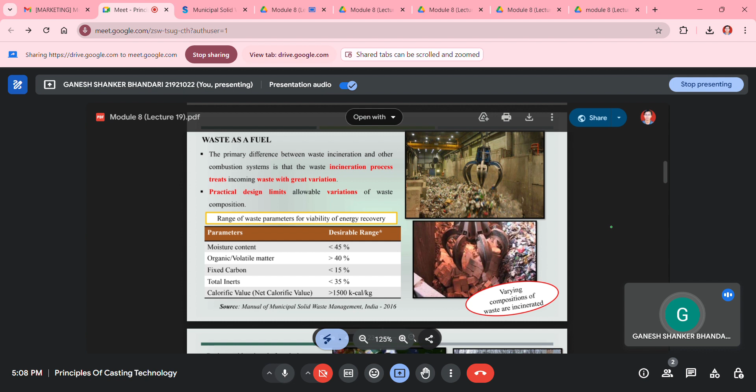Otherwise, if we are going to treat municipal solid waste having a calorific value lower than 1500 kilocalorie per kg as a fuel source, then we will not get the economy out of that process, because we also have to maintain the economy of the process.

So there are some basic considerations before designing municipal solid waste as a fuel source. Best available data on the amount and composition of each waste type has to be generated. Effect of future change in waste management has to be taken into consideration, along with how much street sweeping, construction, and demolition waste is coming frequently.

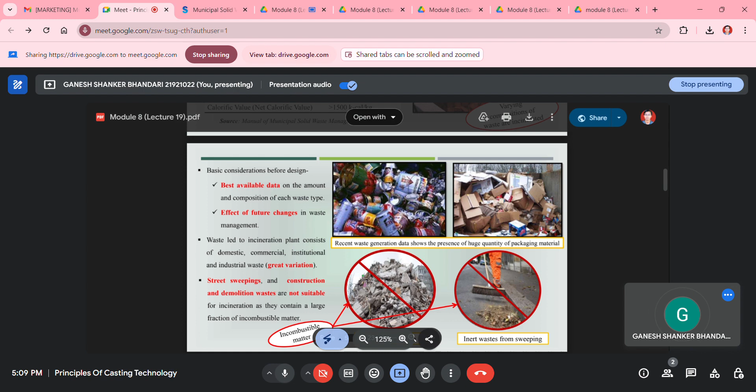That amount has to be taken into consideration, because they cannot be treated as a fuel source. They will finally report into the ash content, and they will not participate in the fuel source or the combustion or incineration process of municipal solid waste management.

Then there are some key parameters during the characterization of waste as fuel. First is heating value - heating value per unit weight or volume of combustible material that is going to be completely burned. Heating value is roughly proportional to the waste that is combustible, excluding moisture and ash content, and to the carbon content of the combustible fraction.

Then moisture content - it is a critical parameter of the waste being treated as a fuel source, because if the moisture content is very high inside that municipal solid waste, whatever energy is produced during the incineration or combustion process is going to release the moisture content in vapor form. So we will not get efficient heating value from the incineration of that municipal solid waste, so it has to be lower than at least 45%.

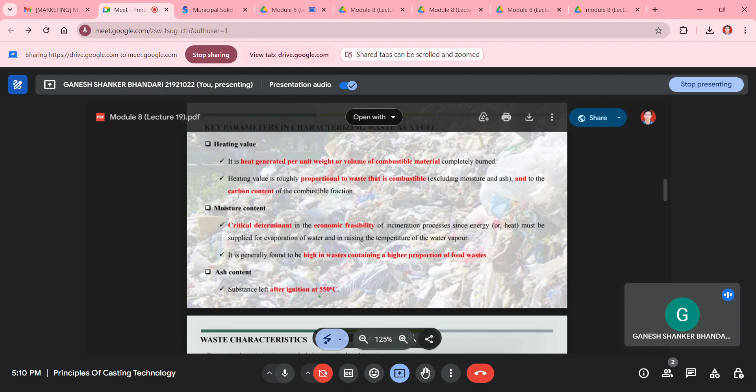Coming to the ash content, it is the substance left after ignition at 550 degrees Celsius. This mainly contains inert materials like street sweepings or demolition waste if coming with the waste content, and sometimes silica content, glass content, or metallic content if present in the waste material will finally go into the ash content.

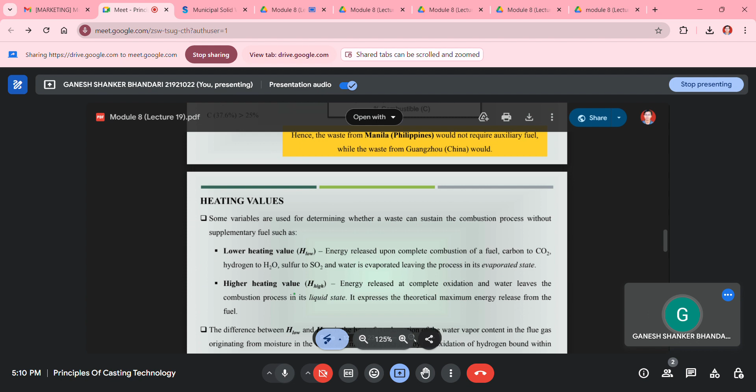Coming to the heating values of the waste, some variables are used for determining whether a waste can sustain the combustion process without supplementary fuel. If we are going to incinerate that municipal solid waste material, first we need to decide if we have to provide some extra fuel material during the combustion process to get efficient calorific value to produce energy or use that energy for something substantial. Whether we need extra fuel material with the municipal solid waste or not will be decided based on the heating values of that waste.

There are two types of heating values we have to take into consideration. First is lower heating value, which is the energy released upon complete combustion of a fuel, where carbon converts into CO2 gas, hydrogen converts into H2O gas, and sulfur converts into SO2. It is complete oxidation of the materials present in the municipal solid waste, and water is evaporated, leaving the process in its evaporated state.

Coming to the higher heating value, energy is released at complete oxidation and water leaves the combustion process in its liquid state. It expresses the theoretical maximum energy released from the fuel, excluding the content of water which would evaporate, as accounted for by the lower heating value. The difference between higher (H high) and lower (H low) heating value is the heat of condensation of the water vapor contained in the flue gas, originating from moisture in the waste and moisture generated by oxidation of hydrogen bound within the chemical structure of the waste.

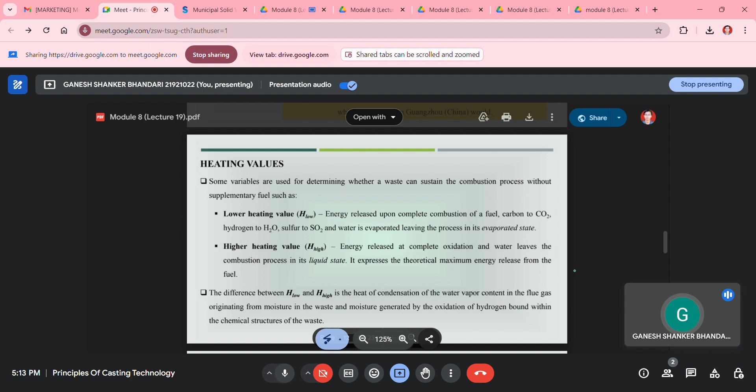With the help of these concepts we can calculate the heating values or calorific values of the waste material. There are formulas for calculating higher and lower heating values. Higher heating value can be calculated with the formula: H low plus water plus hydrogen content into 8.937, into 24.45 kilojoule per kg. The lower heating value can be calculated based on the chemical composition of the solid waste material, like carbon, hydrogen, oxygen, nitrogen, and sulfur content present in the municipal solid waste.

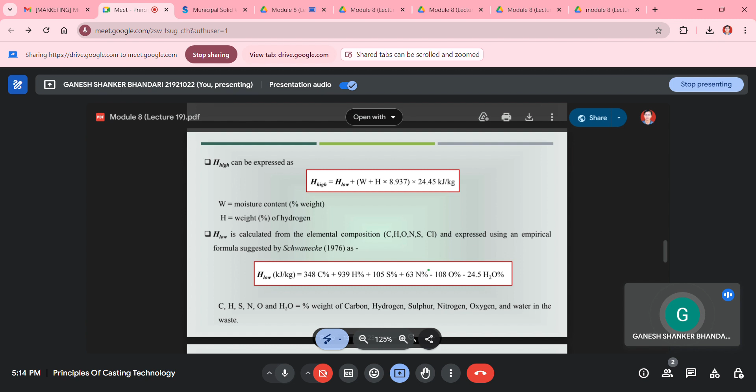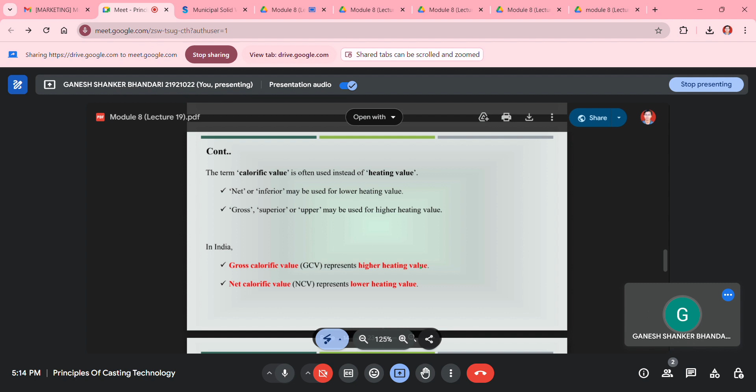The term calorific value is often used instead of heating value. Net or inferior may be used for lower heating value, and gross, superior, or upper may be used for higher heating value. So we can call lower heating value the net calorific value or inferior calorific value, and higher heating value the gross calorific value. In India, we generally use the terms gross calorific value and net calorific value instead of lower and higher heating values.

Coming to the next topic, we can create refuse derived fuel using municipal solid waste. According to this pyramid structure, the most preferred process for recycling municipal solid waste is reduction and reuse. Then we can recycle that waste, such as recycling glass material, cardboard material, or recovering metallic values from the waste material. Then we can go for the composting process.

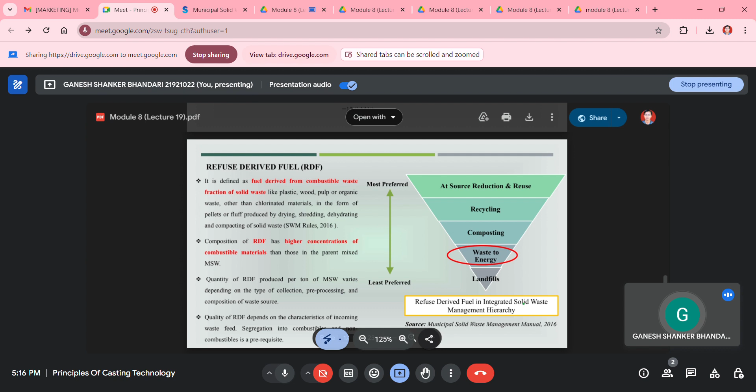So we can see the waste to energy conversion process is the least preferred process during the management of municipal solid waste. After that waste to energy conversion process, whatever is left behind, like demolition waste or inert waste, or whatever ash content is produced, that can go for landfill process. So refuse derived fuel is in the integrated solid waste management hierarchy at a lower position.

And the quantity of RDF produced per ton of MSW varies depending on the type of collection, pre-processing, and composition of the waste source. That will depend on the carbon, hydrogen, nitrogen, sulfur content, and it will vary according to the waste composition.

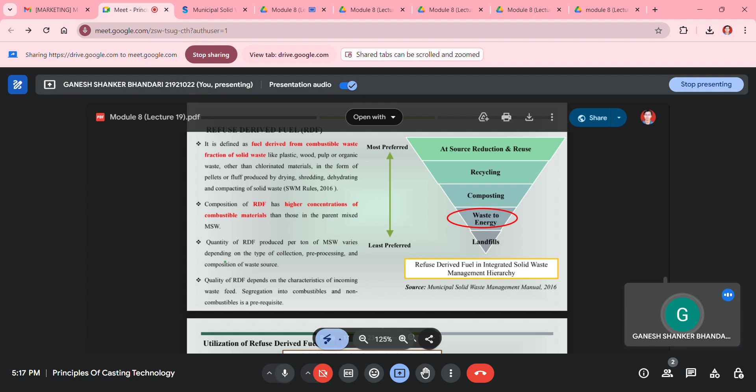If waste composition contains a higher amount of dry waste containing cardboard or paper waste, or leaves and woody material, that waste can be converted into high value refuse derived fuel, because it will have a much higher calorific value. Otherwise it can be converted into low calorific value, which will be of no use to further processing plants.

So for utilization of refuse derived fuel in India, where we are going to use this RDF content, we can go for some industries like waste to energy conversion process or power plant processes, or we can provide this RDF to some households which can use RDF material as a fuel source.

So we can use this RDF material as a fuel source in power plants, similar to how power plants use Indian coal as a fuel source material to produce steam, and by that steam we can produce electricity.

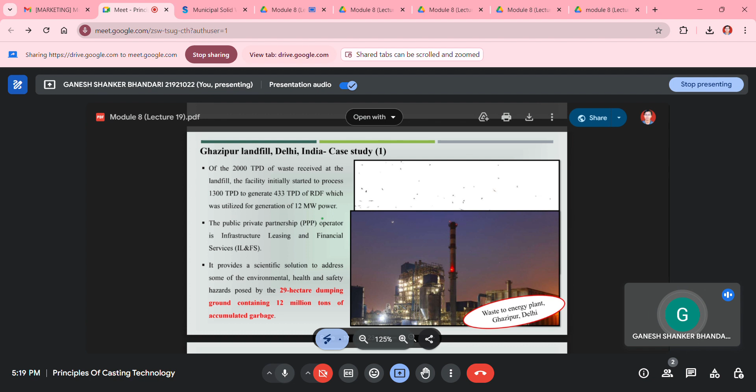There is one case study of the Ghazipur landfill located in New Delhi, which receives around 2000 tons per day of waste, and that facility initially started to process around 1300 TPD to generate 433 TPD of RDF, which was utilized for generation of 12 megawatt power with the help of a power plant.

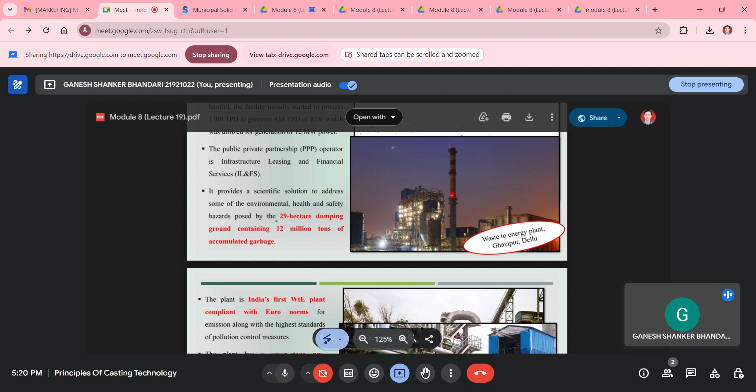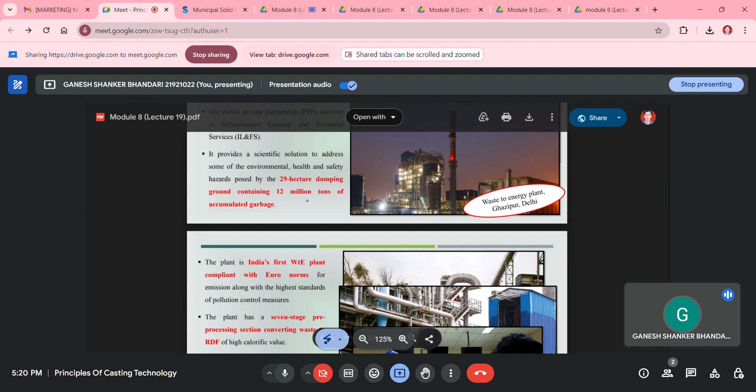The public private partnership (PPP) operator is Infrastructure Leasing and Financial Services. It provides a scientific solution to address some of the environmental, health, and safety hazards posed by the 29-hectare dumping ground, which is used as a landfill site containing 12 million tons of accumulated garbage.

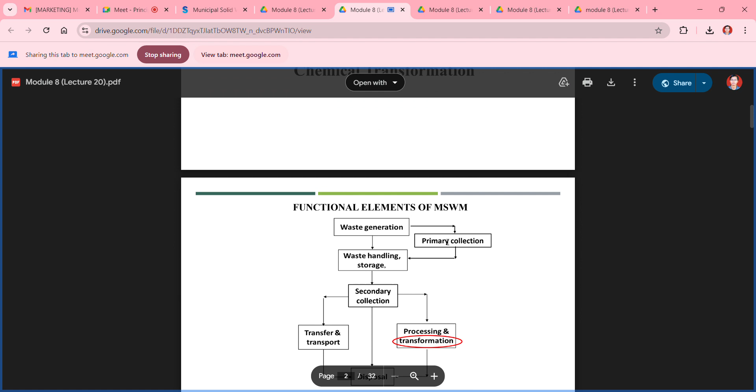Then coming to, so either we can convert that waste material into RDF material to use as a fuel source, then after converting them into RDF, we can go for incineration or combustion process.

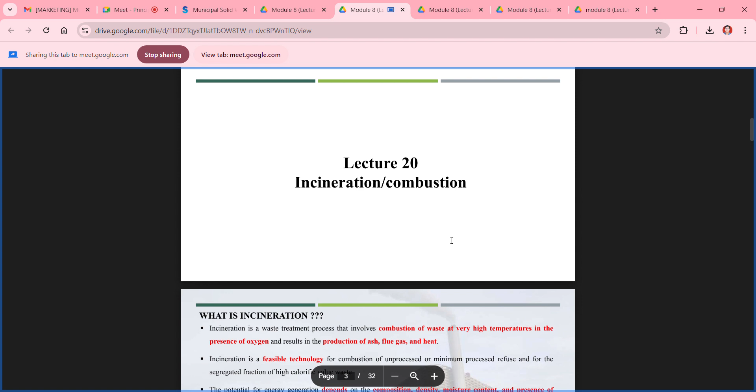So what is the incineration process? The incineration process is basically defined as combustion of waste at very high temperature in the presence of oxygen, and it will result in the production of ash, flue gas, and heat.

That heat can be utilized to produce steam, and that steam can be used to produce electricity. This incineration process can help to reduce the landfill volumes of municipal solid waste.

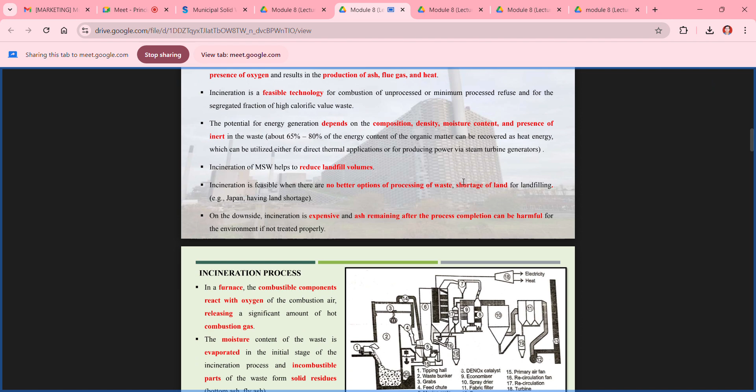There are some equipments generally combined in the incineration process, like a furnace for the combustion process. In the furnace, the combustible components react with oxygen of the combustion air, releasing a significant amount of hot combustion gas, which will have a temperature of around 500 to 800 degrees Celsius.

Or 900 degrees Celsius, and that temperature can easily convert water into steam with the help of a boiler, and that steam can be used to produce electricity in the power plants.

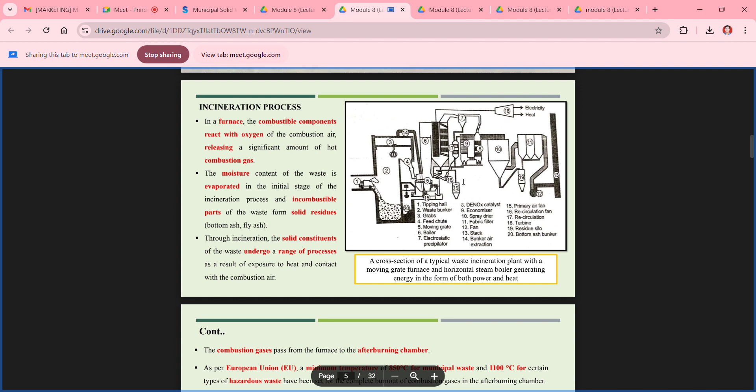The combustion gas passes from the furnace to the after burning chamber. As per European Union regulations, a minimum temperature of 850 degrees Celsius for municipal waste and 1100 degrees Celsius for certain types of hazardous waste have been set for the complete burnout of combustion gases in the after burning chamber. This temperature should be maintained for a minimum time of 2 seconds, as measured from the last injection of combustion air.

Now coming to a brief history of waste incineration. The first incinerators were developed in the United Kingdom in the 19th century for municipal solid waste management. The waste incinerator plants treat waste of great variation in composition, and moving grate technology was developed in the 1920s and 1930s, and developed as a combination of grate with rotary kiln a few years thereafter.

Waste incinerators have gone through changes in technology. First we were using static waste incinerators, then we moved to grate incinerators, and then to rotary kiln type incinerators. Then we utilized electrostatic precipitator processes to remove most of the dust from the flue gases by the 1970s and 1980s, and in the 1990s we incorporated the after combustion chamber.

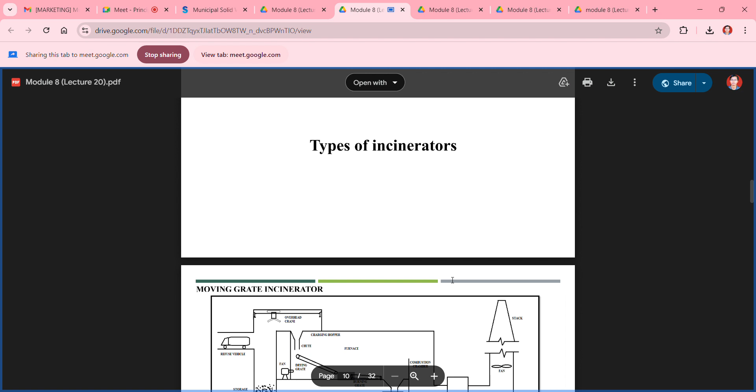There are different types of incinerators commonly used in industry for combustion of waste material, RDF, or even coal material, to convert these fuel sources into high temperature flue gases. That flue gas is used as a heating source for water to convert into steam.

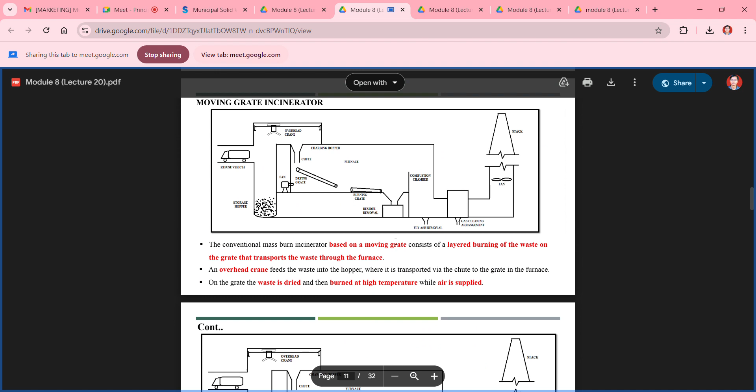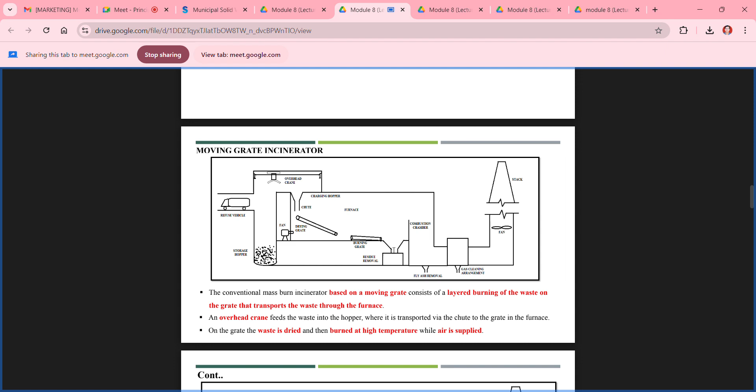There are different types of incinerators, like moving grate incinerators. In a moving grate incinerator, there is a conveyor belt that moves above a furnace at high temperature, and oxygen gas is continuously purged into the incinerator. The RDF material or municipal solid waste combusts and converts into gaseous content. There are advantages and disadvantages of moving grate incinerators; these types of incinerators can accommodate large variation in waste composition and heating values.

Can be built in very large units, like we can build an incinerator up to having a capacity of up to 50 ton per hour.

And there are some disadvantages also, because these types of plant installation cost is very high, and maintenance cost is also relatively high, so we cannot match up with the economy of the whole process.

Then the second type of incinerator is rotary kiln incinerator. As suggested by the name, this is a drum type incinerator which rotates at some angle around 5 to 10 degrees.

This is having some angle of around 5 to 15 degrees, and it is going to rotate in the anti-clockwise or maybe clockwise direction depending on the process. From this direction we provide the oxygen for the proper burning or combustion of the municipal solid waste.

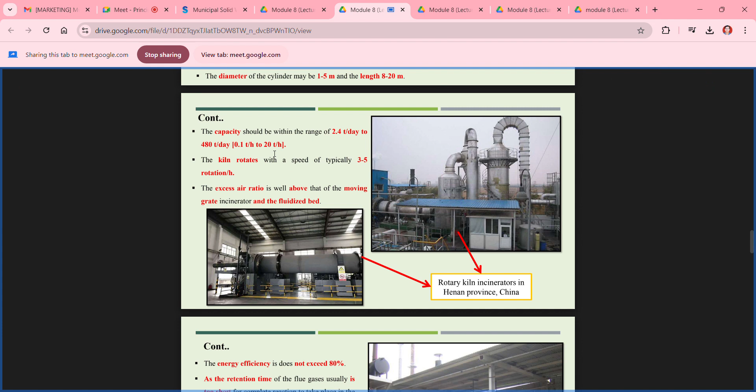It will have lower capacity as compared to the moving grate incinerator, which can have a capacity of around 50 ton per hour, but these rotary kiln incinerators can have a maximum capacity of around 20 ton per hour.

The kiln rotates with a speed of typically around 3 to 5 rotations per hour, and the excess air ratio is well above that of the moving grate incineration and the fluidized bed reactor.

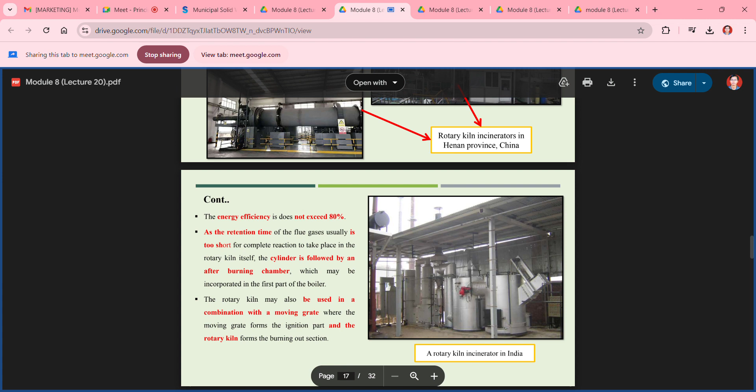So the energy efficiency cannot exceed more than 80%, as the retention time of the flue gas is usually too short for complete reaction to take place in the rotary kiln itself, and the cylinder is followed by an after burning chamber.

So we have to provide an after burning chamber having a temperature of around 850 to 1100 degrees Celsius, which may be incorporated in the first part of the boiler.

The rotary kiln may also be used in combination with a moving grate, where the moving grate forms the ignition part and the rotary kiln forms the burning out section part.

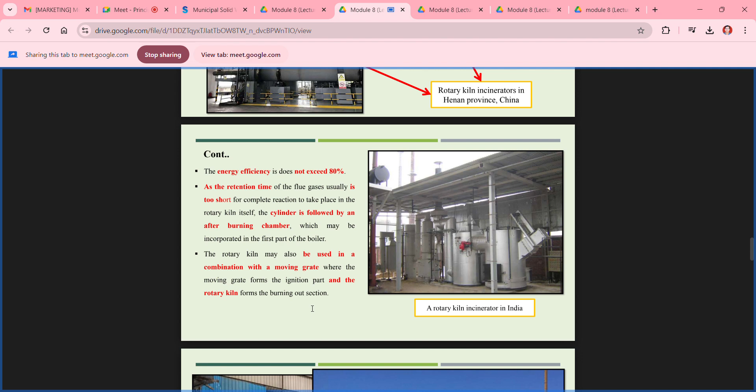So there are some advantages and disadvantages of the rotary kiln. It can be regarded as mostly similar to the moving grate incinerator, but its energy efficiency is lower. Moving grate incinerator can have an energy efficiency of around 95 to 96%, while the energy efficiency of the rotary kiln cannot exceed beyond 80%.

Those were the disadvantages of the rotary kiln. Some advantages are that the plant installation and maintenance cost is very lower as compared to the moving grate incineration, and rotary kiln may be used for new MSW incineration plants with high heating value waste.

So the third type of incinerator is fluidized bed incinerator. In the fluidized bed incinerator we can go with lower size particles - particles having very lower size are suitable for this incinerator.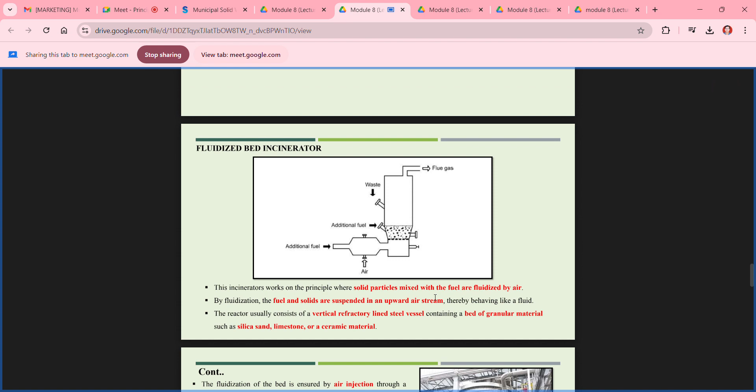The incinerator works on the principle where solid particles mixed with the fuel are fluidized by air, so they will be in the fluidized condition. By fluidization, the fuels and solids are suspended in an upward air stream, thereby behaving like a fluid.

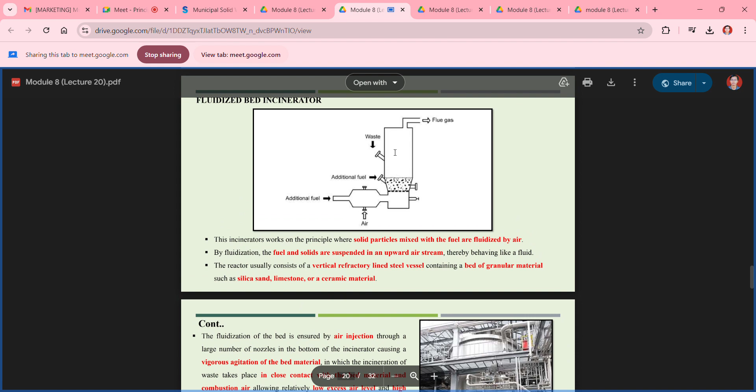This reactor usually consists of a vertical refractory lined steel vessel, as we can see in this figure, containing a bed of granular material such as silica sand, limestone, or a ceramic material.

The fluidization of the bed is ensured by air injection through a large number of nozzles at the bottom of the incinerator, causing vigorous agitation of the bed material, in which the incineration of waste takes place in close contact with the bed material and combustion air, allowing relatively low excess air level and high thermal efficiency up to around 90%.

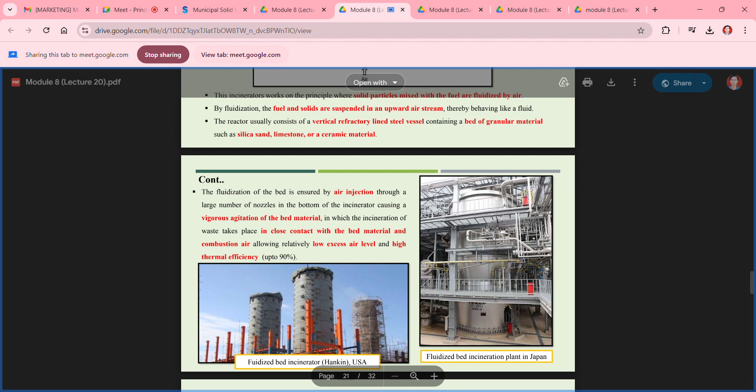So there are some advantages and disadvantages of the fluidized bed reactors, like reduction of dangerous substances in the fluidized bed reactor can be easily done.

There is flexibility regarding low quality fuels and cost, etc., and NOx generation may be low due to relatively low and well controlled combustion temperature. We can control the combustion temperature around 900 or 1000 degrees Celsius, while NOx generation can happen over around 1300 or 1400 degrees Celsius.

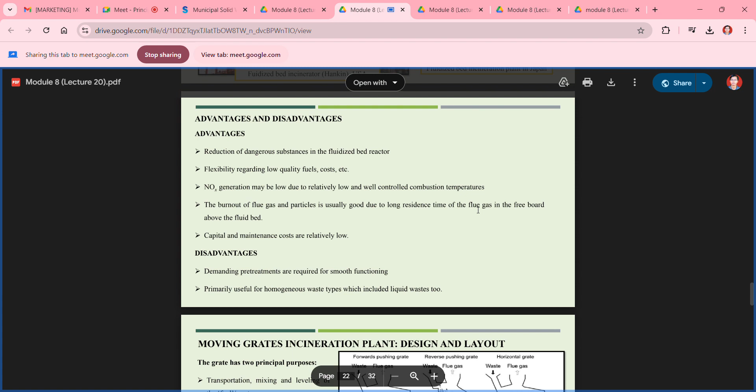So the burnout of flue gas and particle is usually good due to long residence time of the flue gas in the free board above the fluid bed, and capital and maintenance costs are relatively lower as compared to moving grate incinerator or rotary kiln incinerator.

There are some disadvantages also, like demanding pre-treatments are required for smooth functioning. As we have already discussed, these fluidized bed reactors demand lower size particles. The particle size cannot be bigger than around 1 mm or 5 mm, so that it can easily fluidize with the help of the air.

If the particle size is much bigger, around 15 or 20 mm, or 1 inch to 2 inch, we have to provide more pressure of the gas from the bottom to keep the particles in fluidized conditions. So it demands some pre-treatment process for smooth functioning, primarily used for homogeneous waste types, which included liquid waste too. In the fluidized bed reactor, we can use liquid waste also during the incineration process.

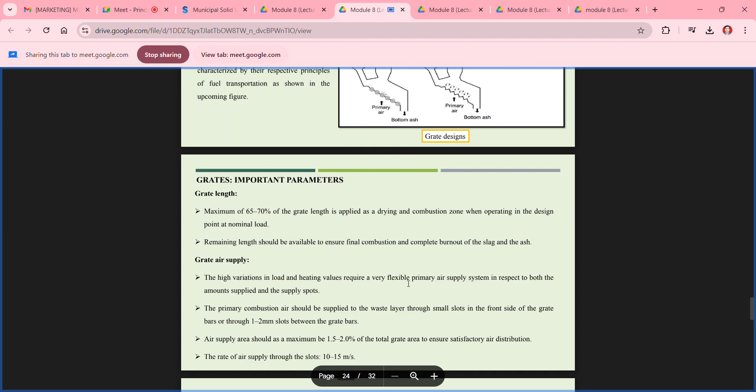Then these are the moving grate incinerators, and now let's see how the energy recovery system works.

First we are going to incinerate the municipal solid waste, or RDF generated with the help of municipal solid waste, and the gases generated during incineration are going to leave the furnace at a temperature of around 1000 to 1200 degrees Celsius.

These hot flue gases are cooled using boilers before being passed on to the flue gas cleaning system. With the help of these boilers, we are creating steam using the flue gas temperature of around 1000 to 1200 degrees Celsius.

During this process, these flue gases transfer their temperature to the boiler, converting the water present in the boiler into steam, and that hot steam is used for generating power in the power plants.

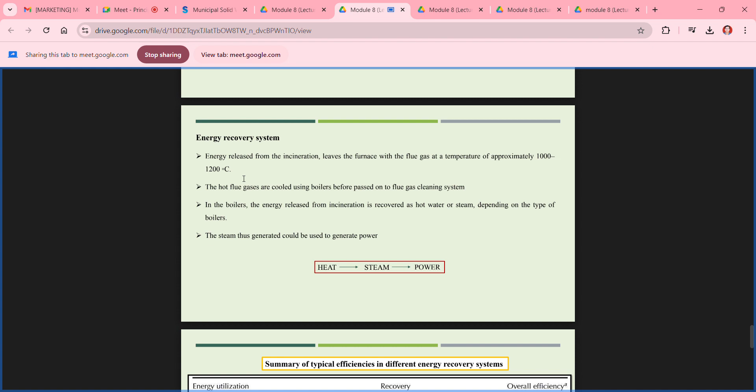During this conversion from water to steam, the temperature of the gases goes down from 1000 or 1200 degrees Celsius to around 100 or 200 degrees Celsius. After that, these flue gases, having a temperature of around 100 or 200 degrees Celsius, go to a gas cleaning system to recover any suspended particles, and after that flue gas cleaning system we release them into the environment.

So, summary of typical efficiencies in different energy recovery systems. If we are only going to heat it, energy recovery will be around 75 to 90%. Then we convert that heat into steam, and that recovery efficiency will also be around 75 to 90% itself.

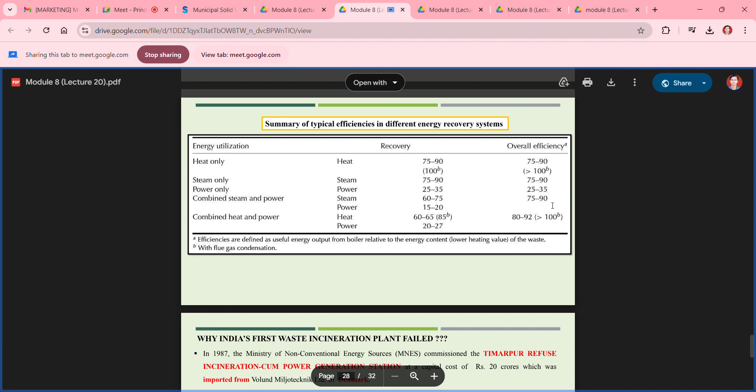Then this steam is utilized to convert into power. This power conversion will have an efficiency of only around 25 to 35%, so the overall efficiency becomes around 25 to 35%. A combined steam and power system can have an overall efficiency of around 75 to 90%.

Now we will go with some case study. India's first waste incineration plant was established in 1987, and it failed. It has not worked. It was commissioned utilizing a capital cost of around 20 crores, which was imported from Volund Miljoteknik of Denmark.

The plant was designed to incinerate 300 tons of municipal solid waste per day to generate around 3.75 megawatt of electricity, and it was designed to incinerate municipal solid waste having a calorific value of around 1462.5 kilocalorie per kg, or around 1500 kilocalorie per kg.

But the calorific value of the municipal solid waste which was supplied to the plant in those days was only around 600 to 700 kilocalorie.

So there was an attempt to supplement the combustion with diesel fuels, in order to maintain a calorific value of around 1500 kilocalorie. They implemented diesel fuel as a supplement material, but it also failed, and the ministry incurred an expenditure of around rupees 1.25 crores on the maintenance and insurance of the plant.

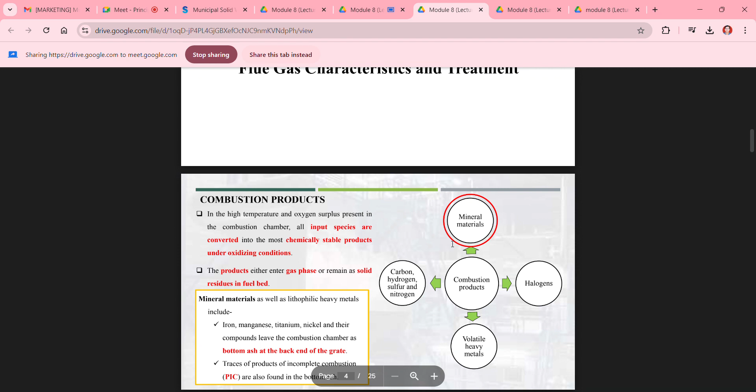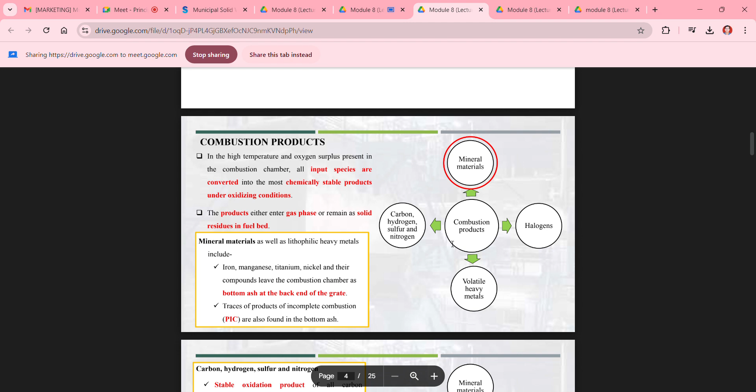During combustion, we get different types of products, like mineral materials in the form of ash content, carbon, hydrogen, sulfur and nitrogen gases, halogens like chloride or bromide, and some volatile heavy metals. In the high temperature and oxygen surplus present in the combustion chamber, all input species are converted into the most chemically stable product under oxidizing conditions. The product either enters the gas phase or remains as solid residue in the fuel beds.

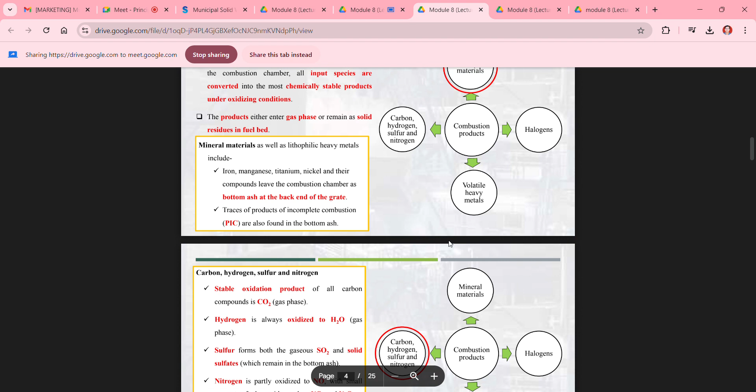Mineral materials as well as lithophilic heavy metals, including iron, manganese, titanium, nickel and their compounds, leave the combustion chamber as bottom ash at the back end of the grate.

Carbon, hydrogen, and sulfur convert into stable oxidation products: carbon into CO2, hydrogen into H2O, sulfur into SO2, and nitrogen into NO2 or N2O, depending on the temperature provided during the combustion process.

Depending on the operation mode, more or less particulate matter leaves the furnace as dust, also known as fly ash, in the flue gas. Incomplete combustion of carbon leads to formation of CO, TOC, polyaromatic hydrocarbons and soot particles, and these soot particles are known to be a source of toxic low volatility halogenated organic micropollutants, especially PCDD or furans.

These halogens are transformed into respective halides. Chlorine is mainly converted into gaseous HCl, while 10 to 15% stays as metal chloride in the solid residue. Bromine can be converted into HBr and metal bromide. Approximately 70 to 80% of fluorine is converted into fluorides like HF gas or in the solid part.

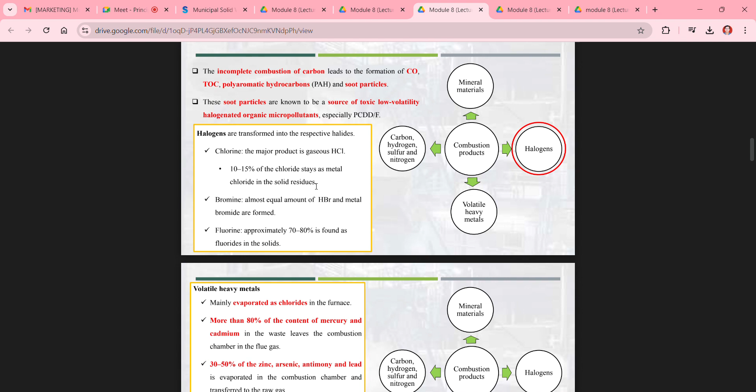The volatile heavy metals are mainly evaporated as chlorides in the furnace. More than 80% of the mercury and cadmium content in the waste leave the combustion chamber in the flue gases.

So we can say the flue gases leaving the furnace or combustion chamber will contain a sufficient quantity of mercury, cadmium and other heavy metals, HBr, HF, HCl gases, and some soot materials like CO, CH4, or unburnt hydrocarbons.

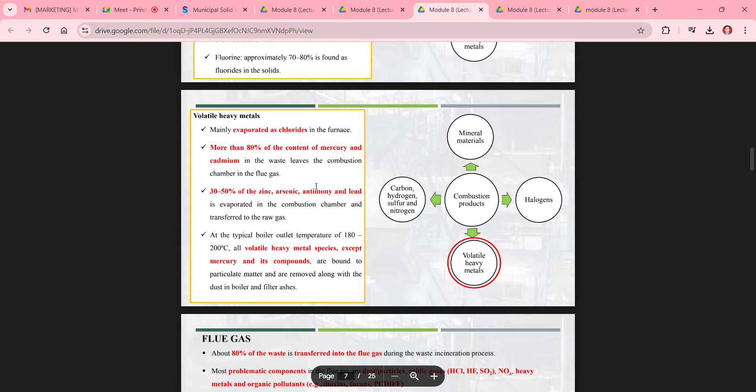So treatment of these gases is necessary. 30 to 50% of zinc, arsenic, antimony and lead, which are heavy metals, is evaporated in the combustion chamber and transferred to the raw gas.

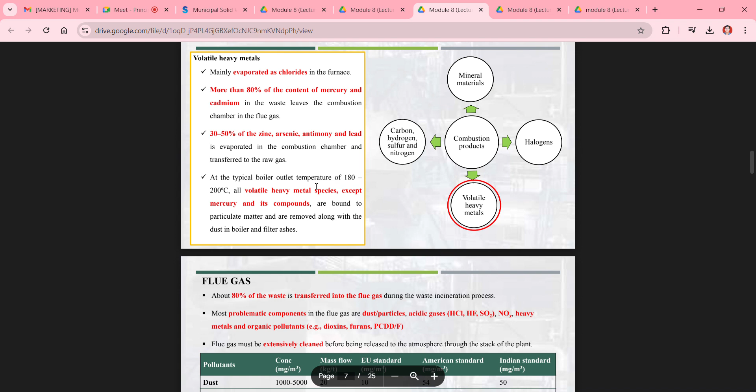At the typical boiler outlet temperature of around 180 to 200 degrees Celsius, all volatile heavy metal species except mercury and its compounds are bound to particulate matter and are removed along with the dust in boiler and filter ashes.

About 80% of the waste is transferred into the flue gas during the waste incineration process. The most problematic content in flue gases are dust particles, acidic gases like HCl, HF or SO2, NOx emissions in the form of NO2 or N2O, heavy metals, and organic pollutants like dioxins, furans and PCDD or furans. Flue gas must be extensively cleaned before being released to the atmosphere through the plant's stack.

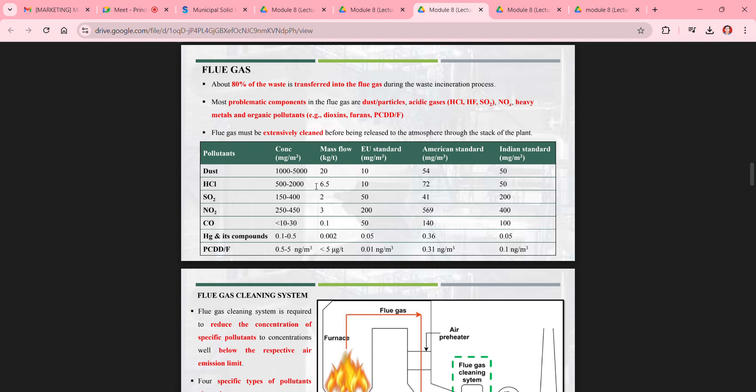A flue gas cleaning system is required to reduce the concentration of specific pollutants, as discussed earlier, to well below the respective air emission limits. There are four specific types of pollutants which need to be cleaned from these flue gases before releasing them into the environment.

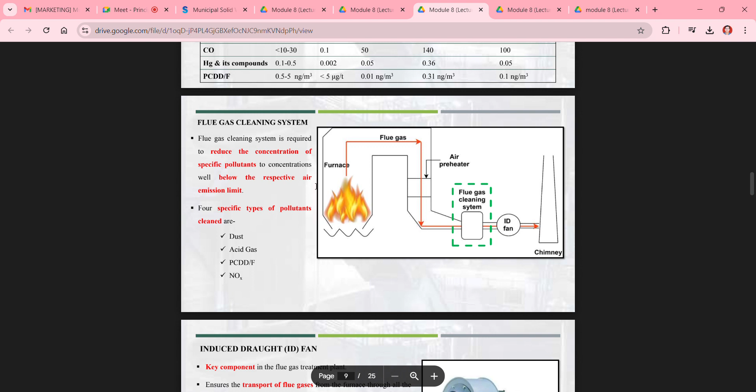First is dust particles, then acid gases like HCl, HBr or HF, then pollutant and harmful compounds like dioxins, furans, and NOx. There are some equipments needed during the treatment of these flue gases. First is the induced draft fan.

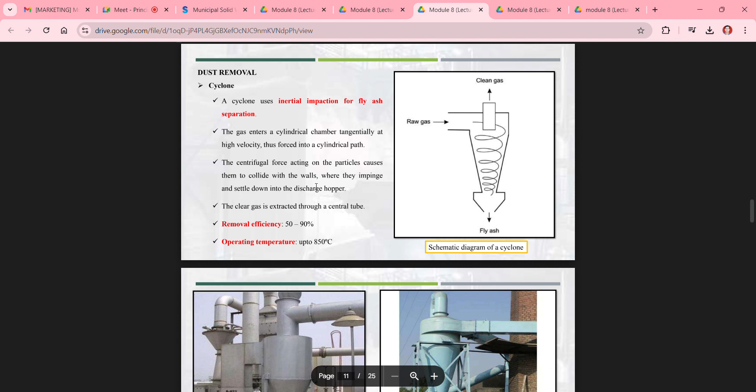Why are we using this induced draft fan? It will ensure that no polluted flue gas escapes from the process equipment by providing a reduced pressure therein. Due to that reduced pressure in the chamber, the flue gas will flow from the higher pressure to the lower pressure part, and from that lower pressure part we can transfer those gases into dust removal systems like cyclone, air cyclone, or water cyclone systems to remove the dust particles from these raw gases.

After removal of dust, we can also go with electrostatic precipitators. In these, we provide some negative or positive charge to the dust particles and to the plates provided in the precipitator, and due to the opposite charge, the dust particles are attracted towards these plates, and due to that attraction these get incorporated on the plates itself.

When we release the charge from the plates, the dust particles incorporated on the plates remove down and we can collect them. So the removal efficiency of electrostatic precipitators is very high, around 95 to 99.5%, and the operating temperature of the flue gases can be up to around 400 degrees Celsius.

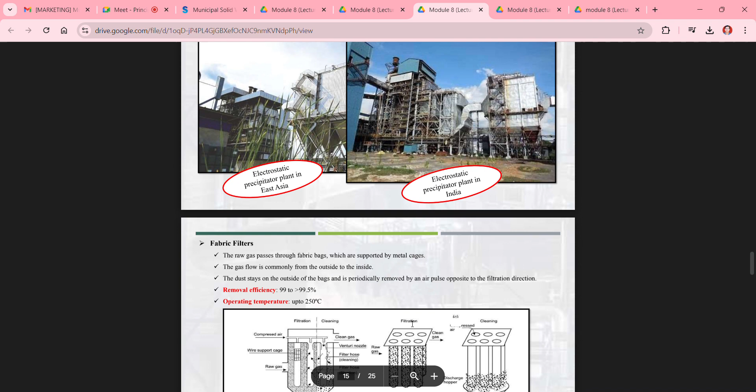Or we can go with fabric filters, because ESP precipitators are a costlier process. So we can go with the fabric filter process also to remove dust particles from the flue gases. These fabric filters have defined porous structures, and we pass the flue gases through these fabric filters.

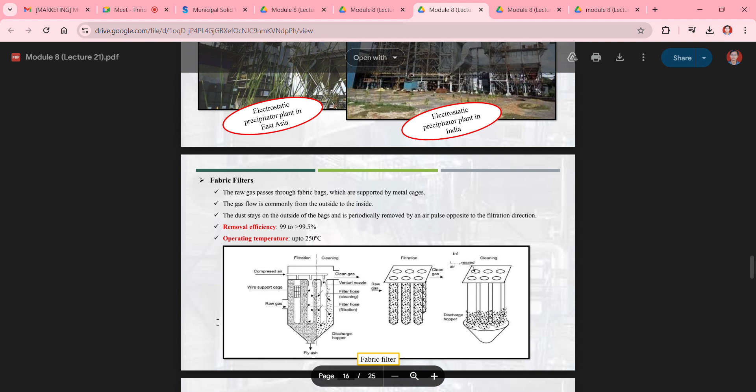According to the pore size, the dust particles get incorporated in these fabric filters, and the gas passes through easily. The removal efficiency can be up to 99 to 99.5%, and the temperature of gases fed into these fabric filters can be up to 250 degrees Celsius.

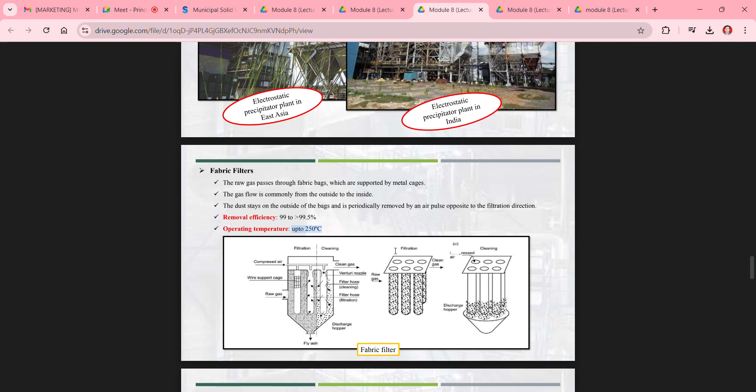Then we can also use a Venturi scrubber, similar to the cyclone separator process, or go with an acid gas scrubber system. With the Venturi scrubber, we provide a wet system by sprinkling water on the waste gases. Whatever HCl or chloride gases are coming in the flue gases react with the H2O sprinkled in the acid gas scrubber system, and the chloride gas gets converted into HCl acid in liquid form.

That HCl acid can be collected at the lowest part and refined again to be used as an industrial acid, or refined to be used as laboratory grade or analytical grade reagent. So during the gas cleaning process itself, we can generate a byproduct in the form of HCl or H2SO4, depending on the gases produced during the incineration or combustion process.

We can also go with dry systems, where Ca(OH)2 or NaHCO3 are injected into the flue gas to neutralize the acidic gas components. These acidic gas components react with the calcium hydroxide or sodium bicarbonate powders, and the gases get neutralized.

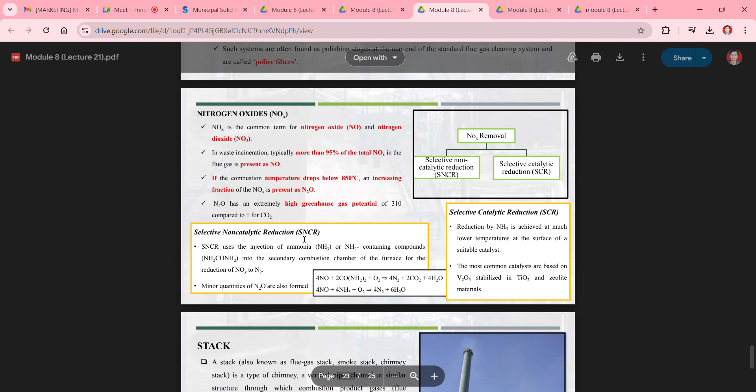Nitrogen oxides, NOx, is the common term for nitrogen oxide and nitrogen dioxide in waste incineration plants. More than 95% of total NOx in the flue gas is present as NO. If the combustion temperature drops below 850 degrees Celsius, an increasing fraction of NOx is present as N2O, which has an extremely high greenhouse gas potential of 310 compared to 1 for CO2. That NO or N2O has to be converted into nitrogen with the help of a reductive environment during the flue gas treatment processes.

Now coming to the next lecture, solid residue. We have discussed about the gaseous generation during the combustion process. Now, along with these gaseous generations, some solid residue is also going to be generated during the combustion or incineration process. We have to characterize that we cannot leave that solid residue as itself. We have to provide proper treatment to that solid residue content.

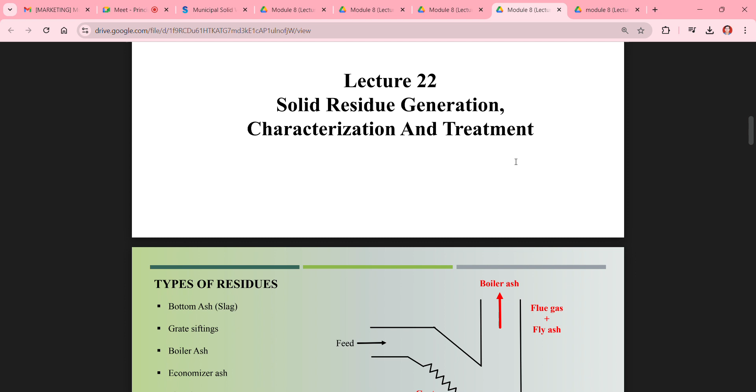If we can recover something from that solid residue, or we can go with the landfill for this solid residue, or we can use this solid residue as an inert material, or use it like fly ash or bottom ash content as a raw material for cement making, because these residues generally contain high amounts of silica material and some amount of sulfur materials also.

So there are different types of residue which are generated during the incineration process: one is bottom ash, which is also known as slag material, then grate siftings, boiler ash, economizer ash, fly ash, and acid gas cleaning residues.

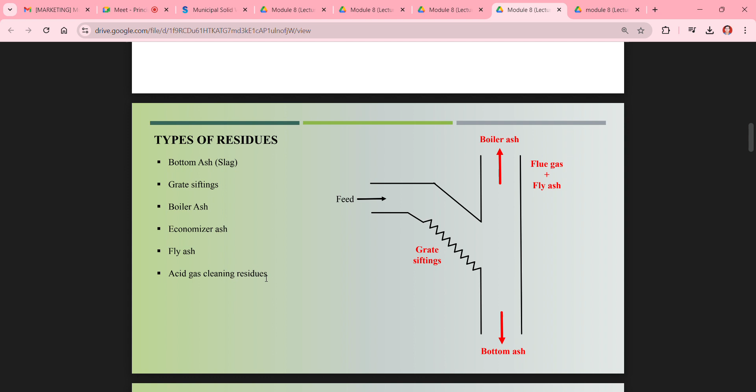The bottom ash is formed and transported through the combustion chamber on the moving grate, and sometimes through a rotary kiln to the quencher. When the bottom ash leaves the grate or rotary kiln, it must be cooled. This boiler ash mainly contains materials removed from the flue gas at the cooler surface of the boiler and other heat transfer equipment. The material that condenses on the surface acts as an insulator, reducing heat transfer rates, and must be removed at regular intervals to maintain proper efficiency.

Coming to grate siftings, material that passes through the openings in the grate, either due to size or because it melts and is trapped in the under-fire air plenums located below the grate, is referred to as grate siftings. Then economizer ash is the finer particles collected from the flue gas in the economizers or economizer hoppers installed in some boiler systems to optimize the recovery of heat from the flue gas before the gas is subjected to more thorough treatment.

Then fly ash is basically catched during the treatment of the flue gases. It generally contains relatively fine ash particles, around 5 micron to 10 micron or 15 micron in size, entrained in the flue gas from the boiler and recovered in electrostatic precipitators or fabric filters. That is generally known as fly ash.

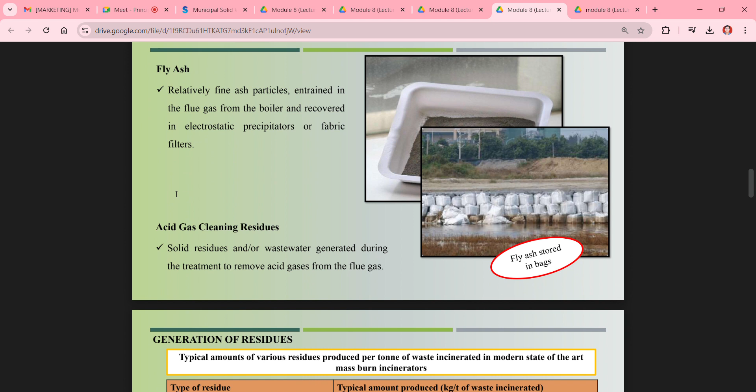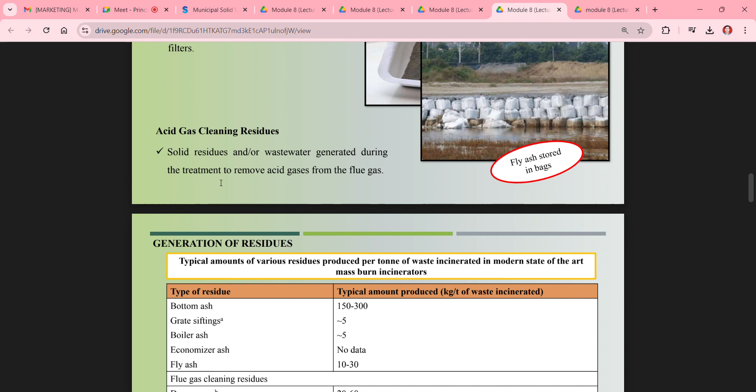Then coming to acid gas cleaning residue, the solid residue and/or waste water generated during treatment to remove acid gases from the flue gases is known as acid gas cleaning residue.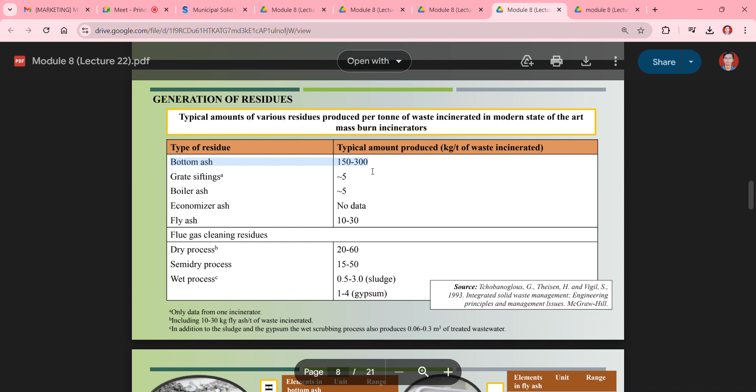The typical amounts of various residues produced per ton of waste incinerated in modern state-of-the-art mass burn incinerators generally contain 150 to 300 kg per ton of bottom ash. Then grate siftings can be around 5 kg per ton, boiler ash 5 kg per ton, and fly ash generated can be around 10 to 30 kg per ton.

Coming to the flue gas cleaning residue, the dry process can produce flue gas cleaning residue of around 20 to 60 kg per ton, because it will also contain the amount of calcium hydroxide or sodium bicarbonate provided as a dry source to catch the flue gas or to neutralize the flue gas.

Then the semi-dry process can produce around 15 to 50 kg per ton, and the wet process can produce around 0.5 to 3 kg per ton of the material in the form of sludge or in the form of gypsum. It will be produced in the form of gypsum if we are going to sprinkle water containing calcium hydroxide content.

So what will happen is that calcium hydroxide is going to react with the SOx or chloride gases during the wet cleaning process, and that calcium hydroxide is going to convert into calcium sulfate hydrate. So that will be known mainly as gypsum content.

Then if we are going to characterize this residue, it will mainly contain silica, calcium, iron and aluminium in a range of around 50 gram per kg for aluminium, iron and calcium, and the major amount is silica, around 240 to 300 gram per kg, and there will be some trace amounts of magnesium, sulfur, phosphorus, copper, depending on the chemical composition of the waste material which is going to be incinerated.

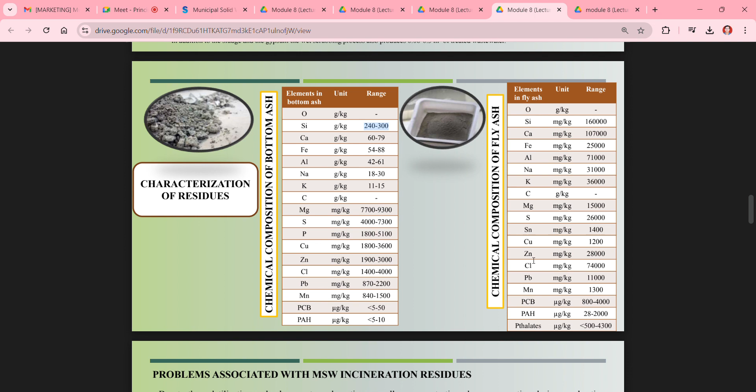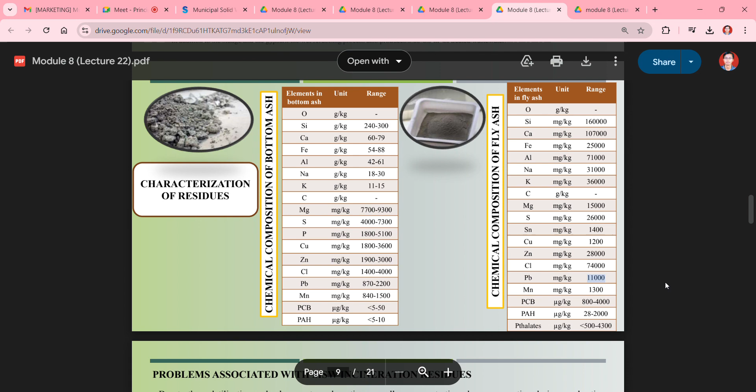The chemical composition of these fly ashes will mainly depend on the initial chemical composition of the municipal solid waste. There are some problems associated with MSW incineration residues due to the volatilization and subsequent condensation as well as concentration phenomena acting during combustion. MSWI residues have high concentration of heavy metals, salts, as well as organic micropollutants.

The fly ash is problematic for incinerator operation and can cause slagging and fouling in addition to environmental issues. The fly ash contains mainly heavy metals, a high content of easily soluble salts, and in some cases polychlorinated dioxin and furan. So what will happen if we are going to leave this fly ash as a landfill material?

If we are going to use it in the landfill, these mainly contain some heavy metals which can be easily water soluble. During landfilling, water will react with these heavy metal contents, and those heavy metals will go into the water bodies, and that will again affect the health of the humans who are using those water bodies.

The quantity, quality and characteristics of MSWI residue depend on many factors such as the composition of the feed, types of incinerator, operating parameters and pollution control techniques. In some European countries, great efforts are devoted to utilization of such residue through various treatment processes. And if utilization is not possible due to regulatory constraints or any other reason, these residues have to be disposed of in an environmentally acceptable and economically sustainable way.

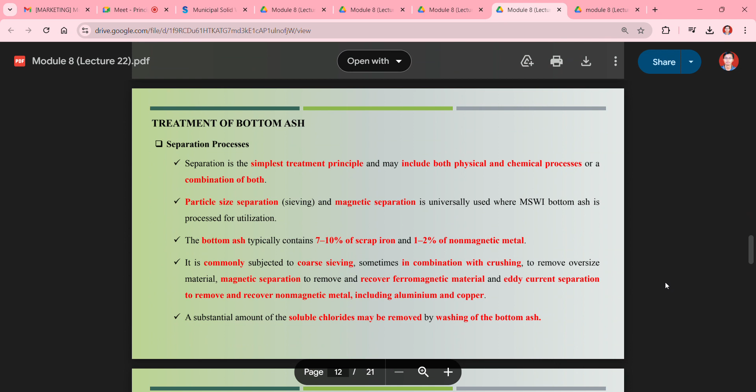Some treatment processes of bottom ash are defined here. Separation process: separation is the simplest treatment principle and may include both physical and chemical processes or a combination of both, like we can separate the silica or iron values from these bottom ashes.

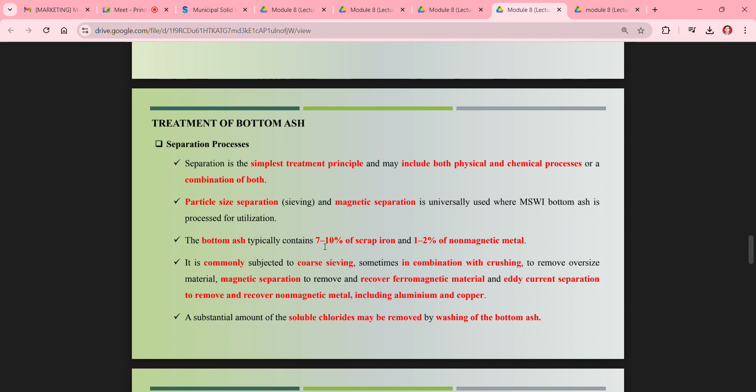Then particle size separation and magnetic separation is universally used where MSWI bottom ash is processed for utilization. The bottom ash typically contains 7 to 10% of scrap iron and 1 to 2% of non-magnetic metal. This scrap iron can be easily separated out with the help of the magnetic separation process, because scrap iron will have magnetic properties.

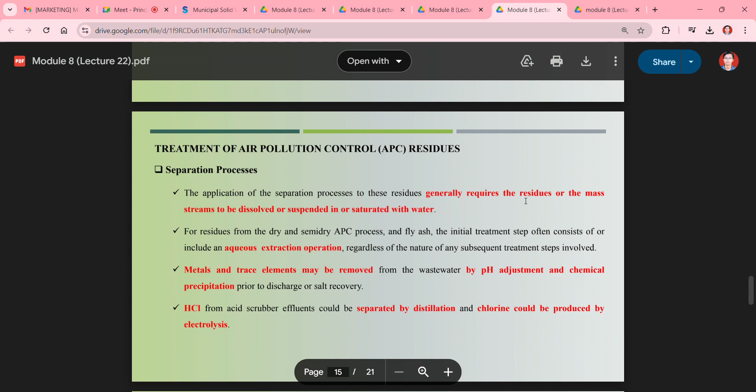There are some engineering applications also for bottom ash. We can use the bottom ash content as a road construction material. Bottom ash substitutes sand or fine aggregates in road construction, either as partial or full replacement, due to its similar properties to natural sand, because it contains around 30 to 40% silica material.

Bottom ash can be used as sub-base, road base material and bituminous mixes for binder layer. Bottom ash provides adequate bearing capacity for lower strength applications such as sub-base materials and embankment fills.

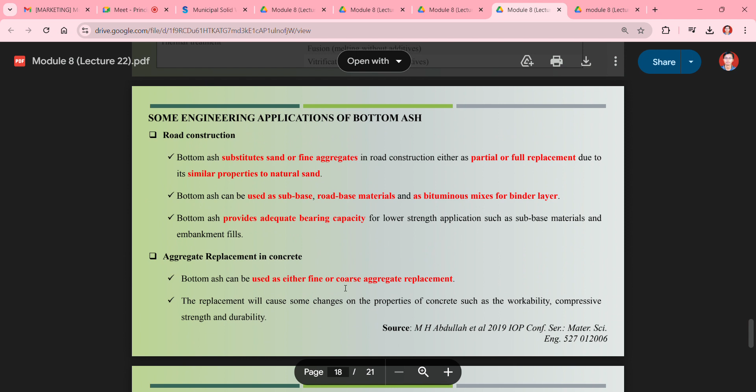It can also be used as an aggregate replacement in concrete material. Bottom ash can be used as either fine or coarse aggregate replacement. The replacement will cause some changes in the properties of concrete such as workability, compressive strength and durability.

There are some utilizations of fly ash material. It can be used as a soil stabilization material, which is the physical and chemical alteration of soil to enhance physical properties. Usage of fly ash for soil stabilization increases the shear strength, controls the shrink or swell properties of soil, and improves load bearing capacity. But before the utilization of fly ash as a soil stabilization material, we have to remove the heavy metals from that fly ash.

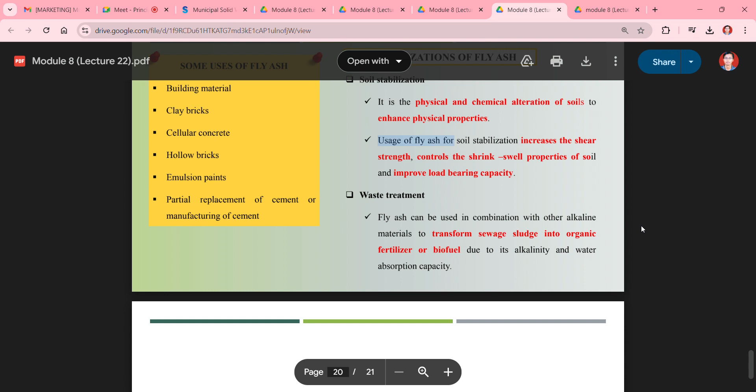Then waste treatment: fly ash can be used in combination with other alkaline materials to transform sewage sludge into organic fertilizers or biofuel, due to its alkalinity and water absorption capacity, because it contains a high amount of calcium and magnesium. So it can be used as a basic material due to its very high alkaline content, and it can be used for water absorption, to treat wastewater, due to its water absorption capacity.